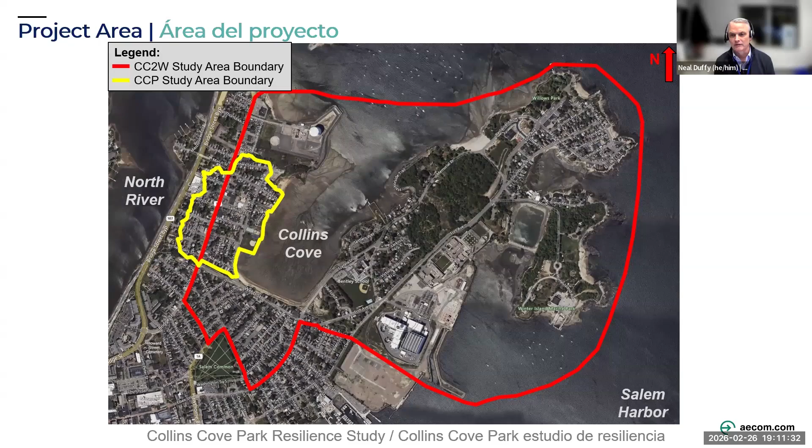I mentioned there were priority areas that were indicated in that study, and one of those priority areas was the Collins Cove Park neighborhood. And so, in this grant, we've been exploring potential options to address the significant stormwater and coastal flooding that occurs in that area, and will continue to increase over the coming years with sea level rise and the impacts of climate change. Next slide, please.

So our first Menti question is, do you live in that project area in the Collins Cove Park neighborhood? We'd like to understand, of the attendees who are here, who actually lives in the neighborhood.

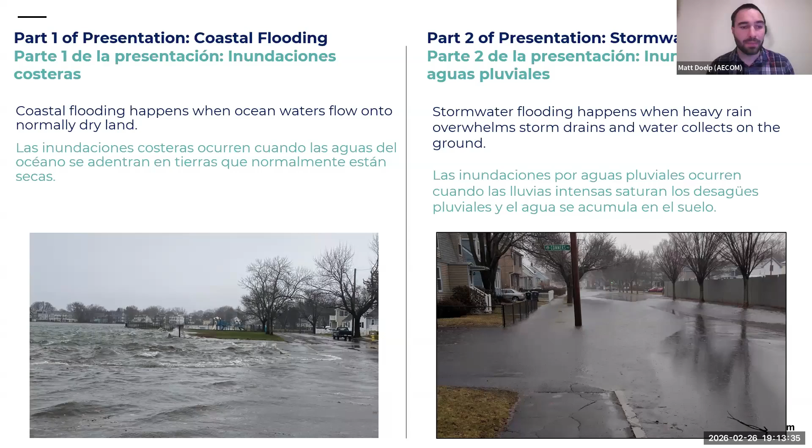I'll talk about coastal flooding, which we're defining as flooding that happens when ocean waters flow onto normally dry land. And then my coworker, Tyler Brinson, will be talking during the second part of the presentation about stormwater flooding, which comes from heavy rains that overwhelm drainage infrastructure and collect or pond on the ground. Next slide.

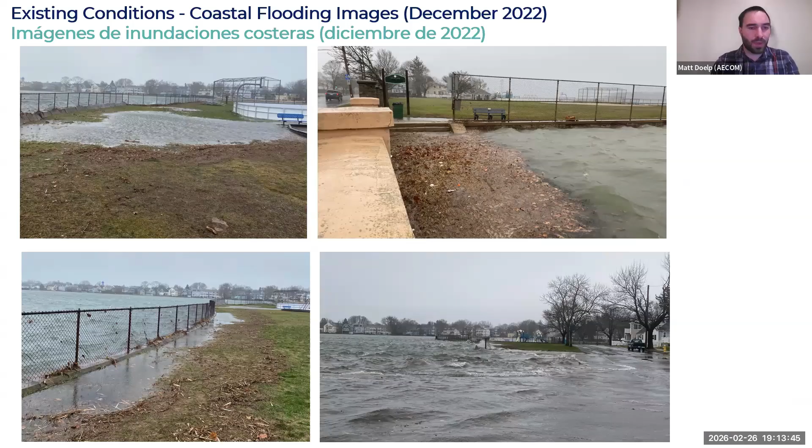So before I talk about some of the conceptual alternatives, I just wanted to talk about some of the flooding that's happened historically. Pictured here are some images from flooding during a storm in December of 2022, in which the park saw flooding in different places. On the left-hand side of the screen, you can see where water started to flood over top of the wall. And then also in the lower left, how it came up through the backside of the wall and flooded behind it.

In the lower right-hand corner, the end of Connors Road was overtopped, and water started to wash out into the streets. So these are just examples of some of the flooding that's happening today during major storms. Next slide.

And so we looked at some available coastal modeling information from the Massachusetts Coastal Flood Risk Model. On the left-hand side of the screen, we used that information to map out the extents and flooding depths for a present-day major storm. And the extents and depths from that flooding were pretty consistent with the flooding that the neighborhood has observed during recent major storm events.

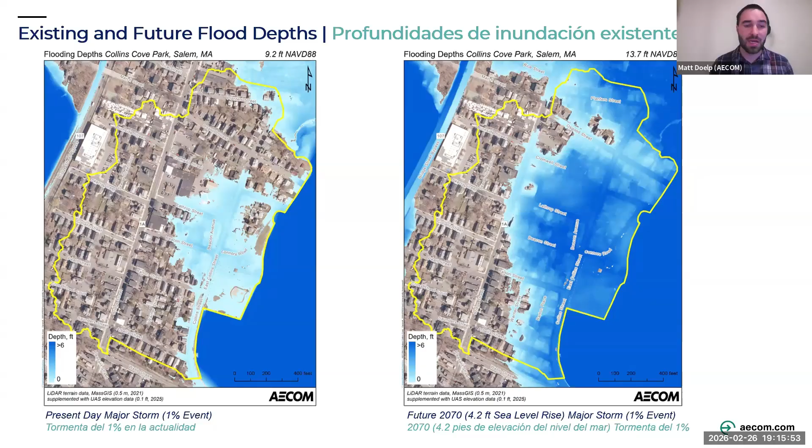On the right-hand side of the screen is a future flooding scenario in 2070 with around 4 feet of sea level rise included. And so you can see that there's much more widespread flooding and deeper flooding in those future conditions. Next slide.

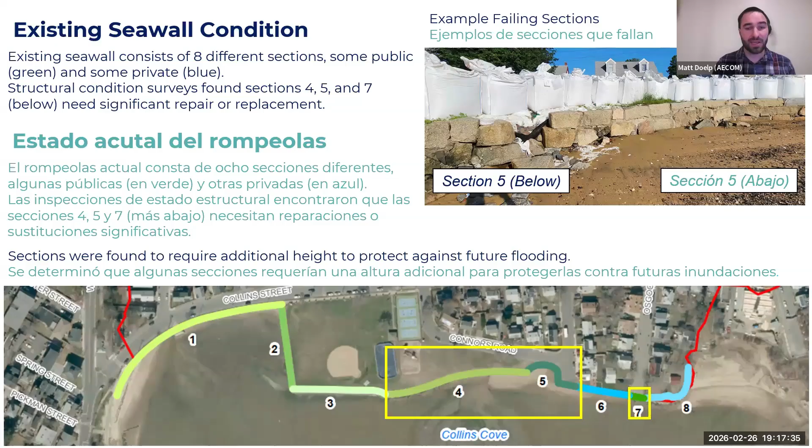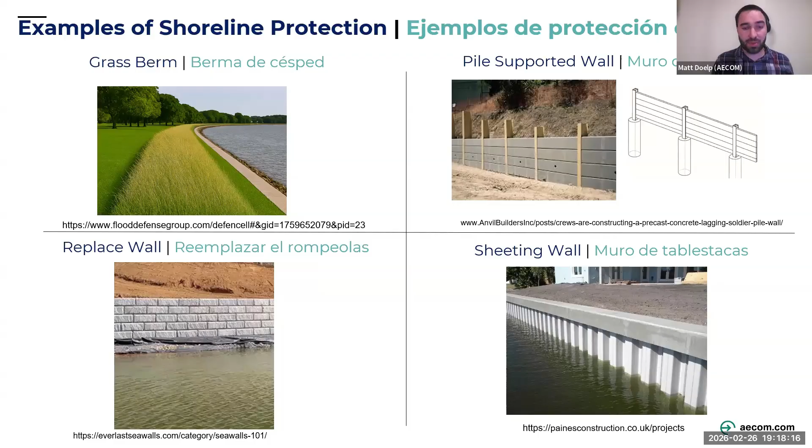So to try to come up with some solutions to mitigate that flooding, we looked at some of the available options for flood barriers that could be implemented in the park to protect against some of those flooding events. I'll talk about each one of these options in detail, but I'll just run through them quickly. The 4 that we looked at are a grass berm, a pile supported wall, a sheeting supported wall, and then an option where we would replace the existing seawall with a new seawall. Next slide.

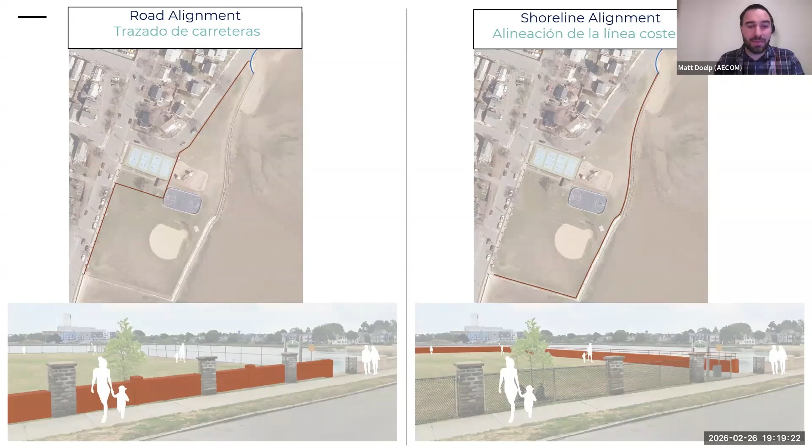Yeah, and so we'd like to get your feedback, and I think Neal will talk through that with you. Yeah, I mean, I know Matt just introduced this concept, but if people are having any initial reactions to those two different alignments, whether a flood wall is along the shoreline behind the existing seawall, or if there were a flood wall along the sidewalk side or road side of the park. You may not have a preference at this point, given that you just heard this concept, but we'd love to know your initial thoughts.

I see a question which I'll answer live. Yes, both of these flood walls, in terms of the coastal flooding, would be equally effective, would be built to the same elevation to prevent the coastal flooding in the same way. With the road alignment, you would be experiencing flooding in the park, on the park side of the wall.

Yeah, and I'll also mention that as part of the design, access points and openings will be designed or included along the alignments in similar locations to where access points to the shoreline or the park exist now. They would likely include some sort of deployable or temporary flood protection structure that would only be set up prior to a storm event. But some of those details would be evaluated at a later design phase.

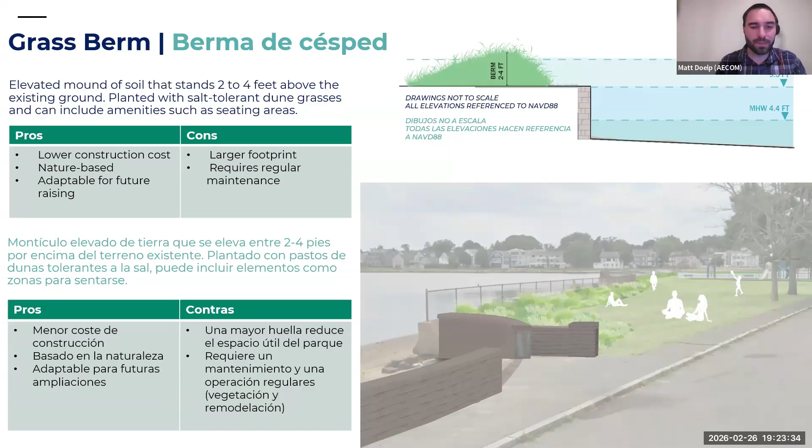So we'd love to hear, through Menti, this is an open-ended question, just if you have some general thoughts on the berm, things that you like or do not like, or concerns you may have about the berm option that Matt described, in a few words, like if you're worried about maintenance, or if you like the idea for pollinators. This is great. Be easy to adjust. Raise, good one. And raising it, one thing that we would need to figure out is the width and the footprint of that, so that we can build up on it if we wanted to. Like that it's more natural.

Yeah, one thing I'm seeing is the walking path and benches on the berm being nice, that's a good point. During later design phases, we'll potentially be able to incorporate amenities and aesthetic features for this option, but they can be worked into other options as well. But certainly the berm potentially has more flexibility in how we can incorporate design features. A good concern: city's not always good at maintaining things. Definitely something that we've discussed as a project team. These are all great comments, and feel free to comment in the Q&A also, if you're not on Menti, even if it's not a question.

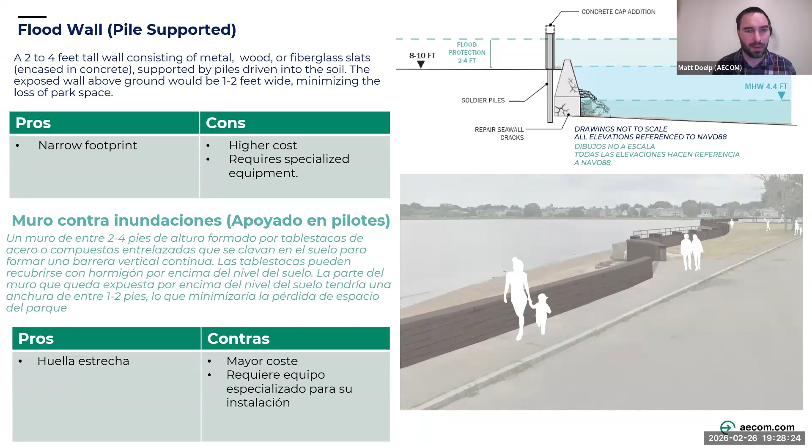So I won't talk too much about this sheeting supported wall option. Above ground it would look almost identical to the pile supported wall option. It would be designed to the same height. The difference is that instead of having piles driven into the ground, it would be a sheeting panel pile that would form a continuous vertical barrier driven into the ground. It would still have a narrow footprint similar to the last option, but would have even less longer term maintenance. Some cons are that it would cost even more than the other two options I mentioned before, and would also require some specialized equipment to install that sheeting. Next slide.

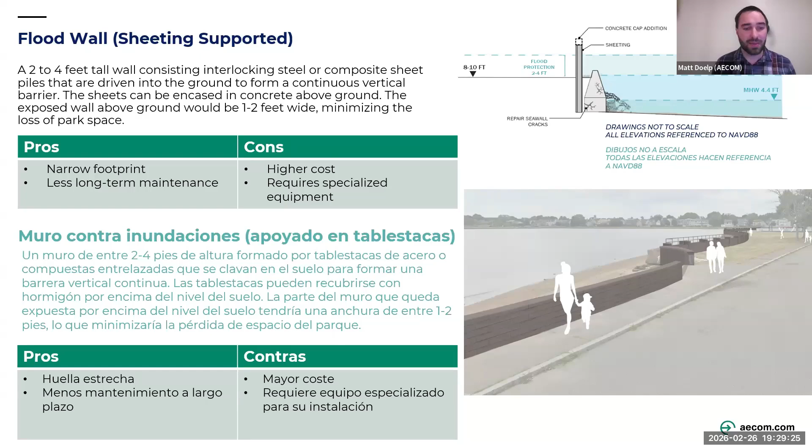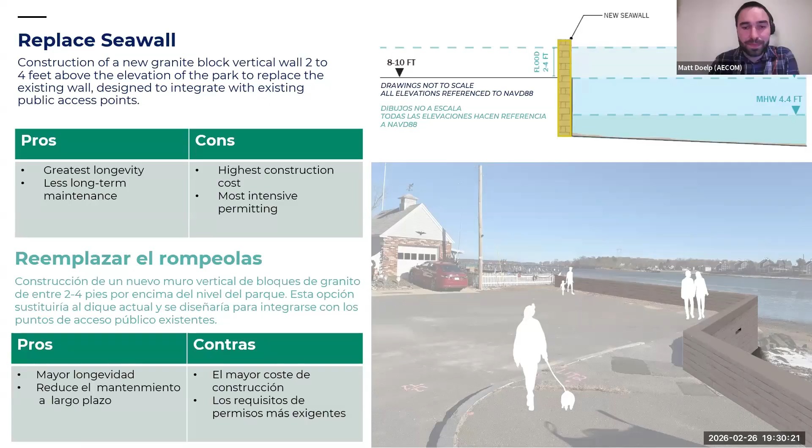And the last option I'll talk about is an option to remove the existing seawall and replace it with a new seawall, likely consisting of granite blocks. This option has the greatest longevity and would require the least amount of maintenance to extend its life. However, some of the cons include a higher construction cost and more intensive permitting involved with getting it through the regulatory process. Again, we have the cross section in the upper right hand corner, and then a rendering in the lower right hand corner of the screen. Next slide.

Yeah, so you probably know what's coming with this question. The wall options aesthetically all look very similar, so we'd like to know how people feel about those options as a grouping. If there are aspects of the wall options that you like or concerns that you may have, we'd love to hear what those may be. Again, whether it's maintenance concerns, cost, the way it may look, longevity, that's a good one. How long will it last? And as Matt said, a little bit later we're going to do some comparisons on these different options to talk through how they compare to one another.

A lot of engineering and maintenance, not particularly attractive. Okay, good to know. And again, the renderings you're seeing are conceptual in nature. So any concept that would move forward would go through a much more significant design process with more feedback. What we're showing you now is a pretty basic boilerplate example of what something might look like. But that's good to know, it sounds like there may be a preference for a berm. Of course, on the Connors Road end, you'd have a wall there no matter what once you get outside of the park.

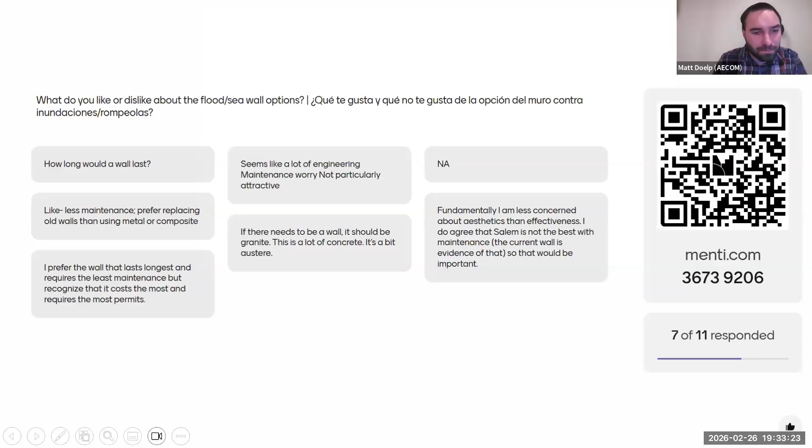This is great feedback. We're going to continue. If people have more feedback, just continue to put that in the Q&A.

All right. Yeah, and so now I know I talked through some of the different considerations for each of the options, but I just want to go through those and then describe each of those considerations, and then we'll summarize them all into a table and talk about that. So the first consideration is permitting and regulatory complexities, which is just the level of effort, review, coordination, and approval required from local, state, and federal agencies.

Design footprint is just the amount of physical space the alternative occupies on the site. Feasibility and constructability is the practicability of building that alternative given site constraints. Construction cost is, as you'd expect, just the costs of construction to build that project and everything involved in that. Maintenance costs are the costs involved with the ongoing inspection, repair, and upkeep required to maintain the functionality of that option over its service life. Next slide.

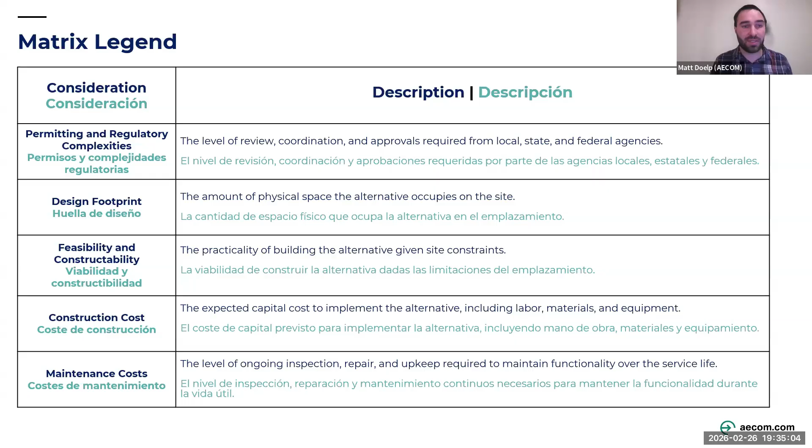So of the four options, the berm had the lowest permitting and regulatory complexities, where the wall had the highest, just due to the construction below the high tide line. Next. From a design footprint standpoint, the berm took up the most space, whereas the new seawall took up the least amount of space from the existing park. Next one.

From a constructability standpoint, the first three options all have kind of the same level of challenges, but we felt like designing a new wall would have the most, just due to, again, the construction in the tidal zone below the high tide line. Next one. From a construction cost standpoint, both the berm and the pile wall were significantly lower than the other options. Putting in the new wall had the highest costs associated with it. And then next one.

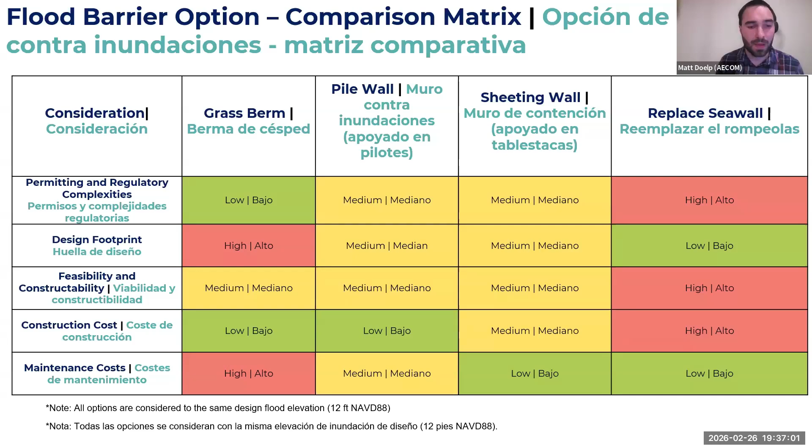Okay, yeah, so we'd love to know your initial reactions. We've gotten them on the different alternatives, but if you're feeling a preference for either the berm option or a wall option, it'd be great to know. If you don't have a preference at this point, that is completely understandable as well. As we mentioned, we'd expect all of these options to be equally as effective.

And also, I'll just mention while we're giving you some time to respond, you may have noticed in the renderings on the Connors Road side there was an opening in the wall, and that's because we did receive some feedback and engagement about access to the beach being important. So we wanted to acknowledge that in the rendering, and there would be some sort of deployable gate essentially that DPS would need to install in that opening when we know that there'd be storm events or any other coastal events happening. But we heard from the community in the earlier engagement that access is important. I think we will maybe leave it at that and move on.

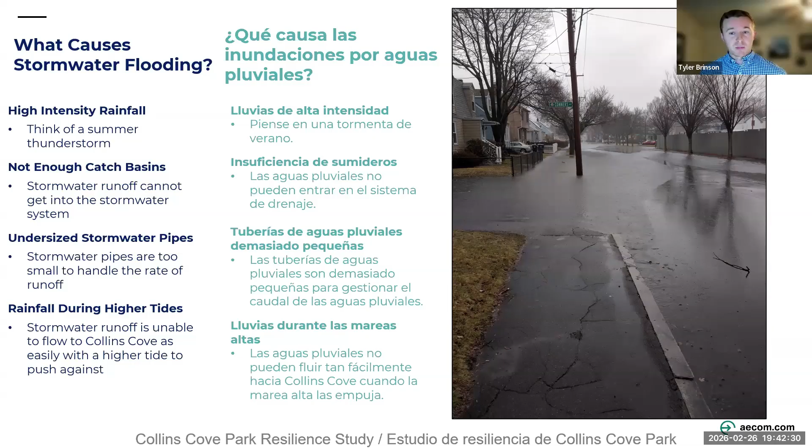The fourth way stormwater flooding occurs in the study area is pretty unique to coastal communities. And this is when rainfall occurs at high tide. When this happens, stormwater runoff is unable to flow through the stormwater system and get to Collins Cove as easily as it is at low tide because the stormwater has to push against high tide.

Next slide, please. So now we want to hear from you. Have you experienced stormwater flooding in the study area? Oh, hold on. There we go. Okay, that's great. And again, if you didn't respond, you can respond in the Q&A, but we can move on. I think there may be another question. And the next question here is, if you have experienced stormwater flooding, where have you experienced it? In the roadway, basement, field, in your backyard? We want to hear from you.

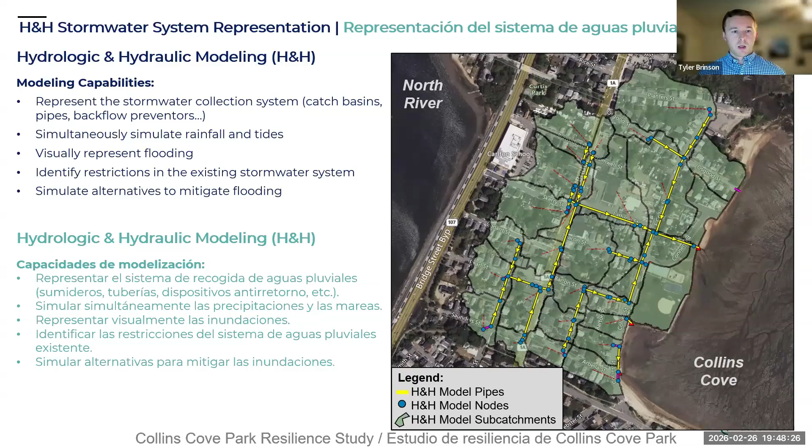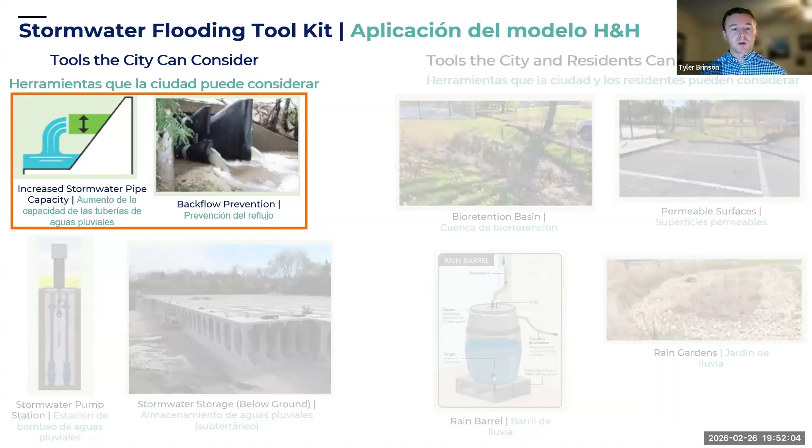When we look at evaluating stormwater flooding in coastal communities, there's really a three-step process that we follow. I'm going to take you through each of those, but step one includes and focuses on increasing the capacity of the stormwater system. So things like increasing the size of pipes, allowing more flow to get towards Collins Cove, and then installing backflow prevention. So during high tide, we don't have stormwater backing up our stormwater outfalls and flooding the streets. Next slide, please.

Before we jump into step one, I want to make sure everyone has an understanding of how the existing stormwater system works. So on the right-hand side of your screen, the yellow pipes represent stormwater pipes. As you can see, flow kind of moves from left to right on the screen, which is shown by the flow arrows here in light blue. Most of the flow from this study area moves towards one stormwater outfall in Collins Cove. You can see it called out on the right-hand side of your screen. What we've seen based on firsthand experiences and our model predictions is that high intensity rainfall can overwhelm this stormwater system in the one stormwater outfall.

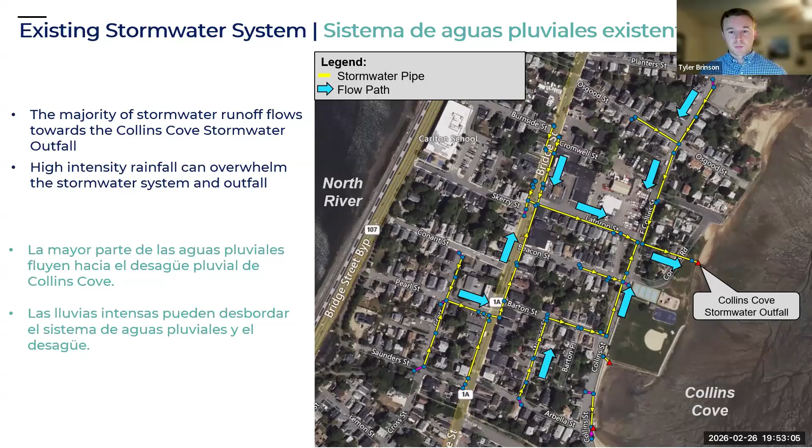On the next slide, you're going to see the image on the right-hand side of your screen change. So this is step one, which is size the stormwater system to carry stormwater runoff from that 2070 high intensity storm event occurring at low tide. The image on the right-hand side of your screen, as I said, went through a pretty significant change from the previous slide. All the pipes shown in light blue now are pipes that we've identified as being undersized. So these would be increasing the pipe size or adjusting the pipe slope to convey more flow through the system towards the Collins Cove stormwater outfall.

The two pink squares that you can see on either side of Connors Road along Collins and East Collins Street are two new proposed catch basins. This allows stormwater runoff to more easily get into the stormwater system.

The two orange pipes that you see in the lower middle portion of your screen are new pipes. Now, these two pipes create a redundant flow path. A redundant flow path is really good for a few things, but its main purpose is to allow stormwater another path to get to Collins Cove before it floods the street. So now, if the Collins Cove stormwater outfall on the right-hand side of your screen becomes overwhelmed, there's another path for stormwater to get to Collins Cove before it ponds on the street.

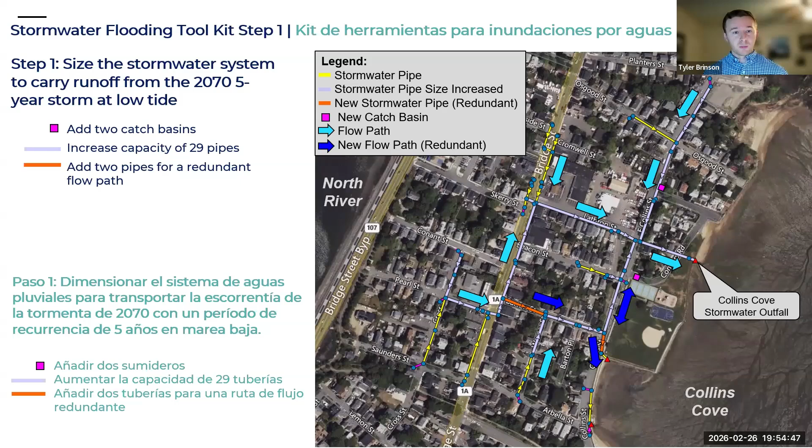Next slide, please. This is that alternative in action. So on the right-hand side of your screen is showing model predicted flooding for that 2070 intense rainfall at low tide. For our baseline here, we had about 3.3 acres of model predicted flooding for this storm event. With all of our stormwater improvements, the model now predicts about 0.2 acres. That's a 94% reduction in the overall flooded acres for this storm event.

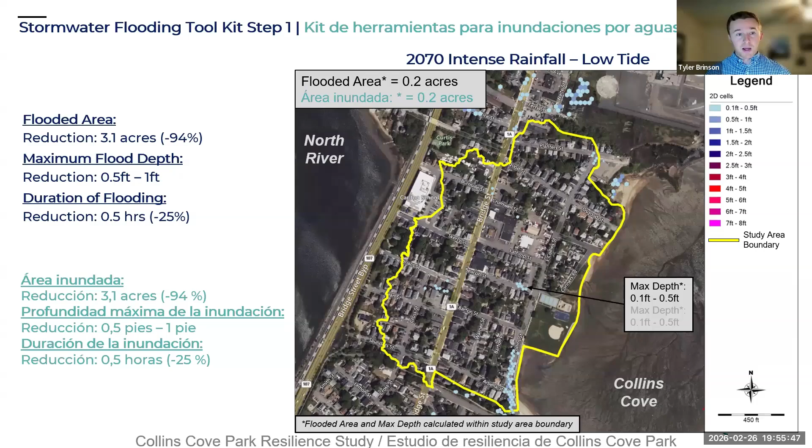Step 2 is to keep all those same stormwater improvements in there, but this time run it for the 2070. And when I say run it, I mean run the H&H model for that same 2070 intense rainfall event, this time occurring at high tide. So you can see there's still a decent amount of flooding predicted when that intense rainfall occurs at high tide. However, we do see improvements from our baseline scenario. We see a 20% reduction in the flooded area, which is mainly seen in those orange circled areas.

Unfortunately, we don't really see a decrease in the maximum flood depth, but a key here is we do see a reduction in the duration of flooding. So when it does flood, if you get an intense rainfall event that occurs perfectly at high tide, we're able to get that stormwater out of here much faster than we're able to now, by about 2 whole hours. Next slide, please.

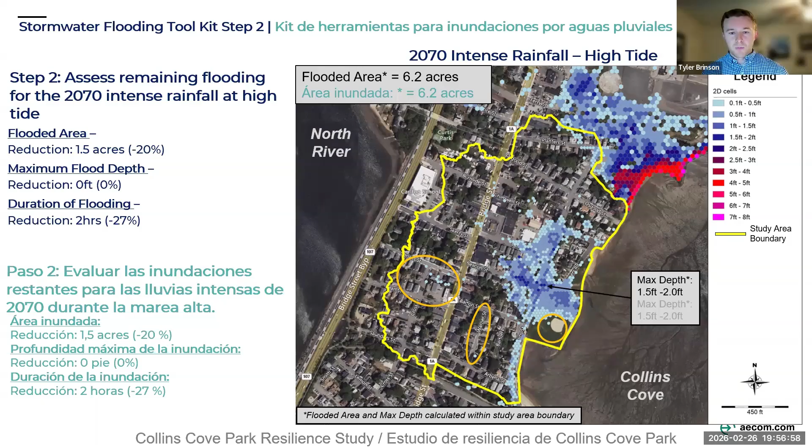Now it's time for step 3, which is evaluate alternatives for the remaining stormwater flooding occurring at high tide. Now, for this step, we have to reach pretty deep into our stormwater flooding toolkit here and pull out 2 big pieces of infrastructure, that being stormwater pump stations and stormwater storage. Now, it's important to note that we're not looking at these on their own. When we evaluate stormwater pump stations and stormwater storage, we're keeping what we just talked about in step 1, all those stormwater pipe improvements and the backflow prevention, those are included. Now we're supplementing that alternative with a pump station or storage, which we're going to talk about on the next few slides.

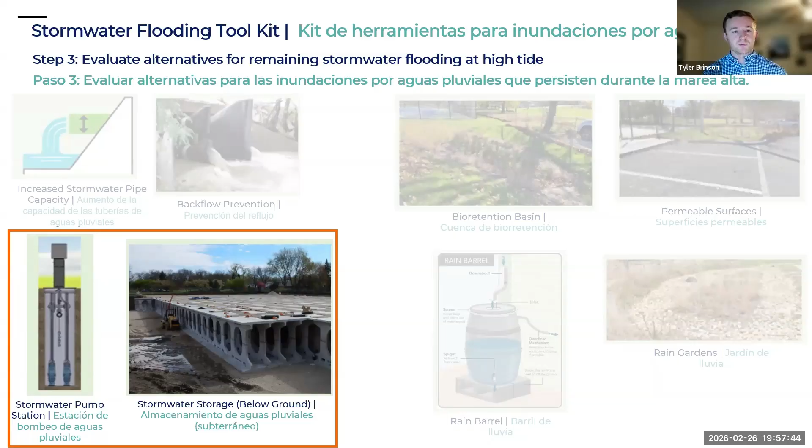This pump station would be approximately 25 feet in diameter and 14 feet deep. There would be 2 pretty large pumps in there that would convey or pump stormwater to Collins Cove during high tide. This stormwater pump station would have a maximum flow rate of approximately 44,450 gallons per minute. Now, I know that's a little hard to conceptualize. It's a really big flow.

So in an attempt to kind of conceptualize it for you, your kitchen sink flows at about 3 gallons per minute. So we have a lot of kitchen sinks here that we need in order to convey that flow into Collins Cove when it floods during high tide. This pump station would take about 2 years to construct, with an estimated cost of $3 to $5 million. Now, this pump station has some pros and cons. The pros are that during high tide, it reduces stormwater flooding that we saw on a previous slide.

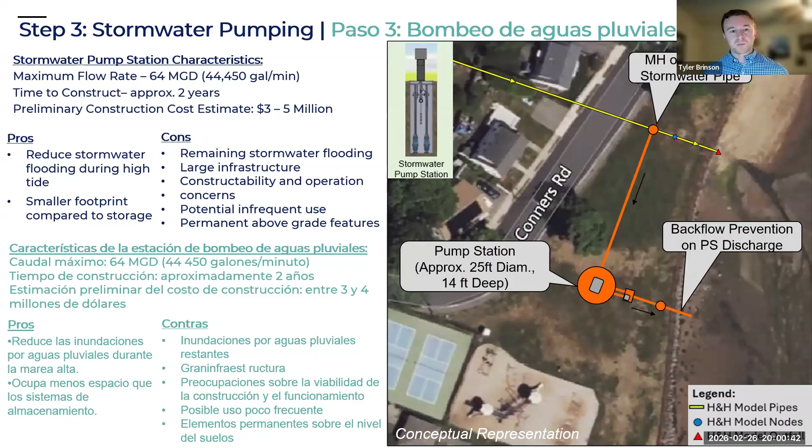And then there's also above grade permanent features. There would need to be an electrical box and then access hatches that are large enough to remove the pumps if they need to be serviced. So that would be a pretty decently sized access hatch. Next slide, please.

Now we're going to talk about stormwater storage. Now, I don't want to scare anyone. The image on the right-hand side of your screen is just a conceptual representation. Any sort of storage tank that could be constructed here does not necessarily need to be a perfect square, and it doesn't need to be sited exactly in the middle of the baseball diamond. We can play around with the size and the shape. But this is just here to give you a sense of scale for how big this piece of infrastructure would need to be in order to have a meaningful impact on stormwater flooding occurring at high tide.

So in the image, we can see our stormwater system. Again, it's those yellow pipes. And then we see an equalization chamber here, right in the middle of East Collins Street. All this would be subsurface. But what this equalization chamber allows us to do is efficiently divert stormwater to any storage tank that would be in the park. Once at the storage tank, we see a range of sizes here, ranging from the smaller dark blue square, which is about 500,000 gallons, to the biggest purple square of 2.5 million gallons.

A piece of infrastructure this big would take about 3 years to construct, and it would have a construction cost ranging from $30 to $50 million. And that range is really just due to the difference in size here. Some of the pros are that we meaningfully reduce stormwater flooding during high tide when you look at your larger tank sizes. And it can be used during larger storm events that occur at low tide even.

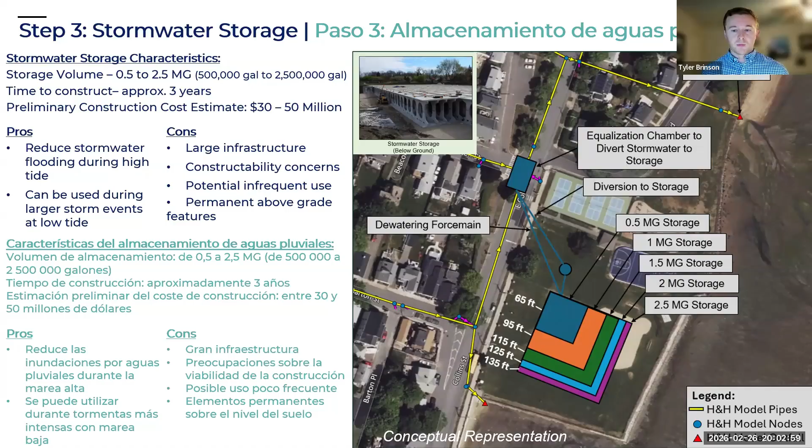So a path forward here. We can see, based on the H&H model predictions, that improving the ability of the stormwater system to carry more stormwater is predicted to significantly reduce stormwater flooding when it occurs at low tide and still have an impact even at high tide. However, stormwater flooding is still predicted to occur within the study area, no matter what we do.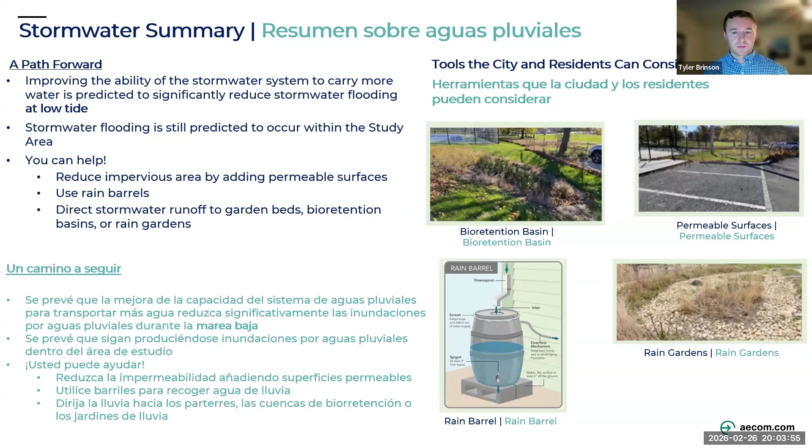But you can help by implementing some of the tools on the right-hand side of your screen, like bioretention basins and permeable surfaces, and using things like rain barrels. We're able to stop stormwater runoff where it falls and not allow it to get to the stormwater system. And with that, I'm going to hand things off to my colleague, Ellen, to talk about the groundwater monitoring study.

Hey, everybody. This is a really interesting presentation so far. As Neil said, we did hear from some of the folks in our community outreach that you were concerned with groundwater and how that might affect the flooding in the area. So as sort of an addition to this project, we were given a little bit of extra money from the Coastal Zone Management to install some monitoring wells.

And so the image that you see on the right-hand side is a map of this Collins Cove neighborhood that we've been talking about. And the little light blue circles that you see are the locations of the 3 groundwater monitoring wells that were installed in late November last year.

So the first one, called monitoring well number 1, or MW1, is on the corner of Conners Road, very close to East Collins. The second one, monitoring well 2, or MW2, is at the corner of Bridge Street and Lathrop Street, next to the brake and clutch facility. And then the third, monitoring well MW3, is down adjacent to the park.

So we basically wanted to understand how groundwater behaves in this area. And it will help us to understand if groundwater is having an impact on the stormwater flooding that Tyler was just telling us all about.

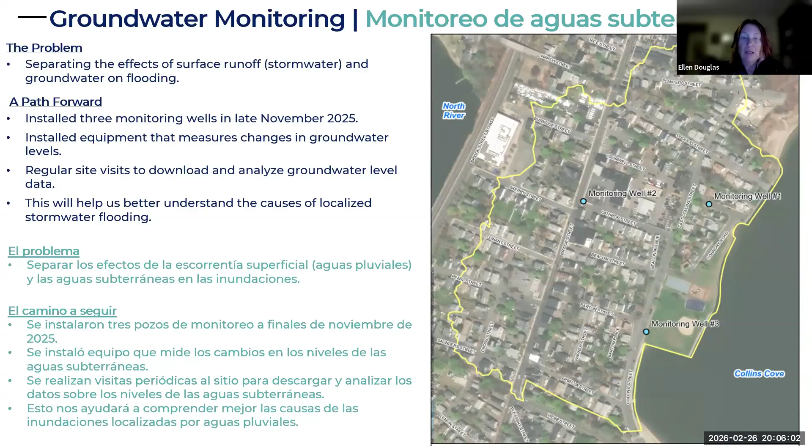And so these monitoring wells were installed, and then we put inside these wells little instruments called transducers that measure how the groundwater level goes up and down in response to storm events, in response to rainfall, in response to normal climate conditions. Next slide.

We've been downloading data as we can, and this graph, I'll explain what all the lines stand for, but this graph shows us some of the initial results that we got from these groundwater monitoring wells. So towards the top of the graph, you see three colored dashed lines. The orange dashed line represents the elevation of the land surface at MW2, which is near the brake and clutch at the corner of Bridge Street and Lathrop. And the green dashed line is the land surface for MW3, which is near Collins Cove Park, and MW1 is the land surface elevation for MW1 on Conners Road.

And then the other jiggly lines that you see are the actual groundwater elevations as they change over time. So MW2 is in orange. That's higher because it's higher up and the whole area is higher in elevation. And so you can see that these data start around the beginning of December, and you see how groundwater moves up and down and can respond pretty quickly to some precipitation events and then goes down over time.

And MW1 and MW3, given that they are so much closer to the coast and also at similar elevations, respond very similarly. One thing that we did find already is that the tides don't seem to impact the groundwater elevations or the fluctuations of the groundwater in this area. So we can see just how it responds to rainfall events and different seasons.

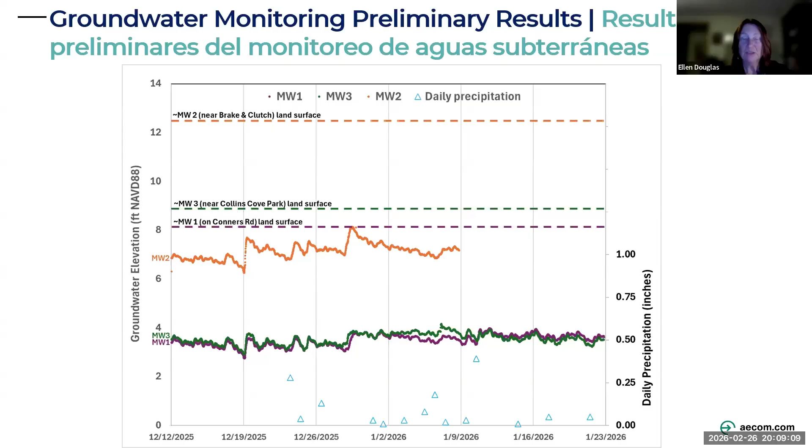So I'm going to hand it off now to Barbara, and she's going to talk more about community engagement. Barbara, you're muted still. Thank you. I just want to thank Ellen and thank everybody for coming this evening and staying with us.

Community engagement is so important, and in the past we've done interviews, we have a flood survey, and we've done meetups at Collins Cove, and we're going to continue that. So anyone here tonight who hasn't spoken with Allison or I, or Neil and Christian, we'd love to have a conversation with you, invite you to come. Our first meetup will be Thursday night, March 19th from 5 to 6. We usually meet in the gazebo, and hopefully it'll be a nice day and we can actually take a walk. The last couple of times we've done it, it's always been raining. But the snow will be melted by then, we hope.

The other thing is that the flood survey is still up on the community engagement page for the project, and you can see the QR code, and at the end we also have the URL for that. So we want you to stay connected with us, come to a meetup, stay involved, because at this point we have these design concepts and we really need to hear from the people who use the park, who live in the neighborhood, and the residents as to whether this is a good direction to go in. Next.